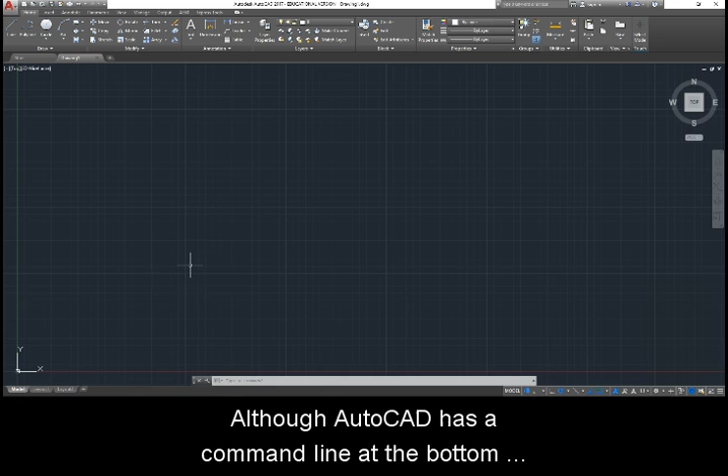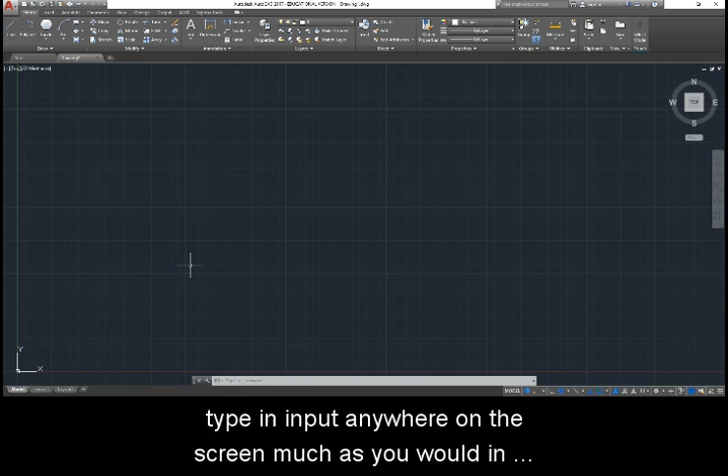Although AutoCAD has a command line at the bottom of the drawing area, which allows you to enter commands directly into the program, there is another more efficient way to manually enter commands called dynamic input. Dynamic input allows you to type input anywhere on the screen, much as you would in the command line. Let's draw a few shapes to see how this works.

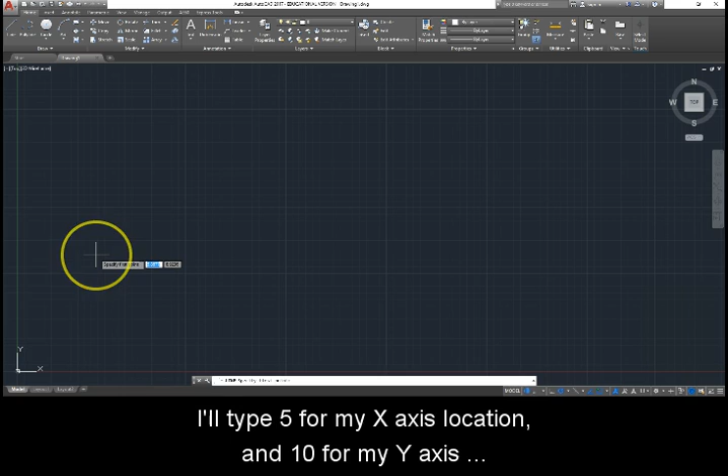First, I start the line tool. On the screen, I can park my cursor anywhere I wish to enter a Cartesian coordinate to establish the first point of my geometry. I'll type 5 for my x-axis location and 10 for my y-axis location, then push the enter button on my keyboard. My first point has been established at the exact coordinates I entered.

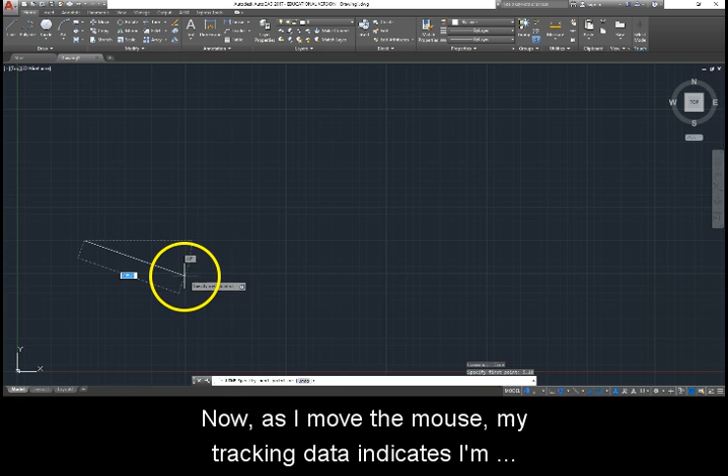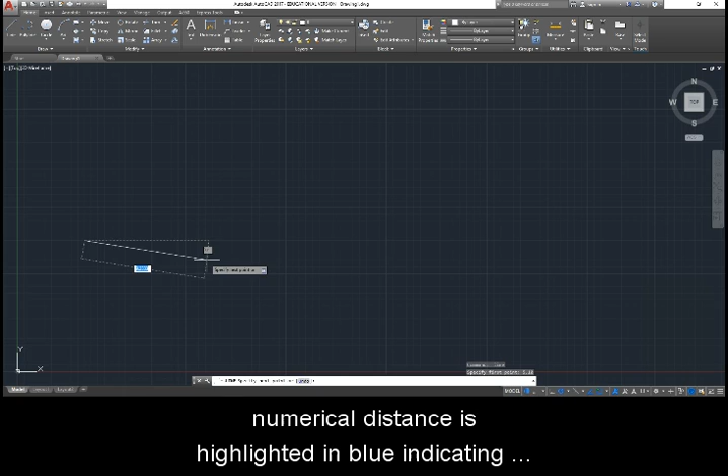Now, as I move the mouse, my tracking data indicates I'm working with polar coordinates. It gives me two dialog boxes, one with a numerical distance and one with a polar angle that change as I move the cursor around. The box containing the numerical distance is highlighted in blue, indicating that I can type input. I type 10 in the numerical distance box, which is also known as direct distance.

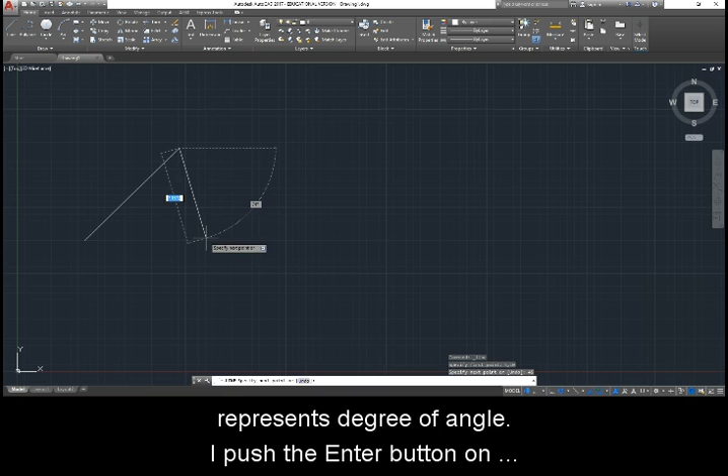Then push the tab button on my keyboard to switch from direct distance to the polar angle box and enter 45, which represents degree of angle. I push the enter button on my keyboard and geometry is locked in at 10 units in length at 45-degree angle. This is dynamic input. Let's try a rectangle.

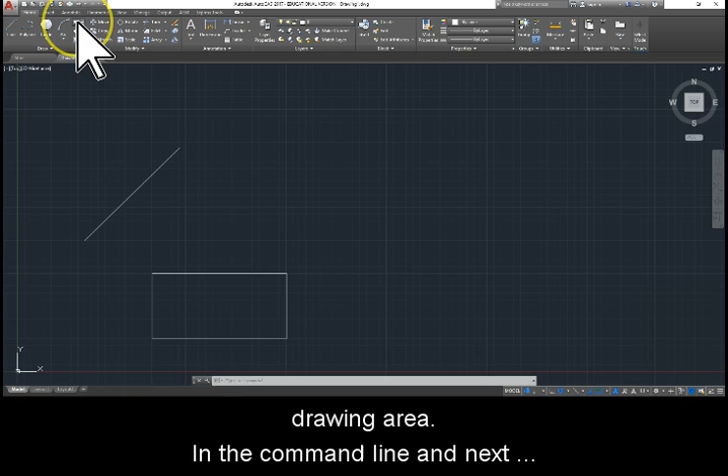I select the rectangle tool and bring my cursor to the drawing area. In the command line and next to my cursor, I see a message that asks for the first point of my rectangle. I can enter a Cartesian coordinate, but it's not necessary. I can simply click the left mouse button anywhere I wish to place the first point, and it will lock in automatically to that specific point using a Cartesian coordinate format.

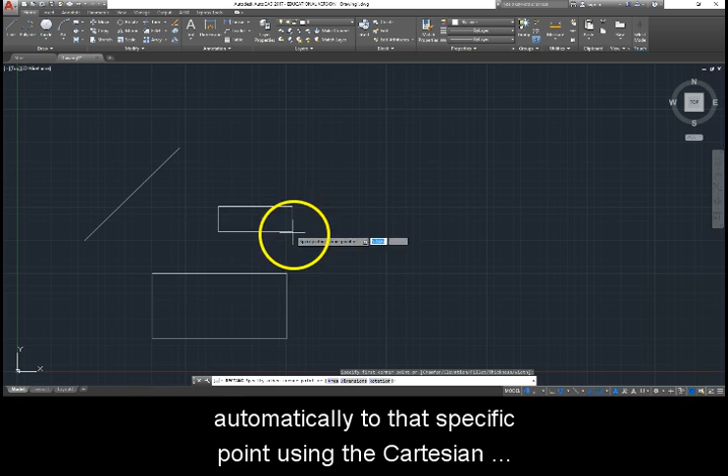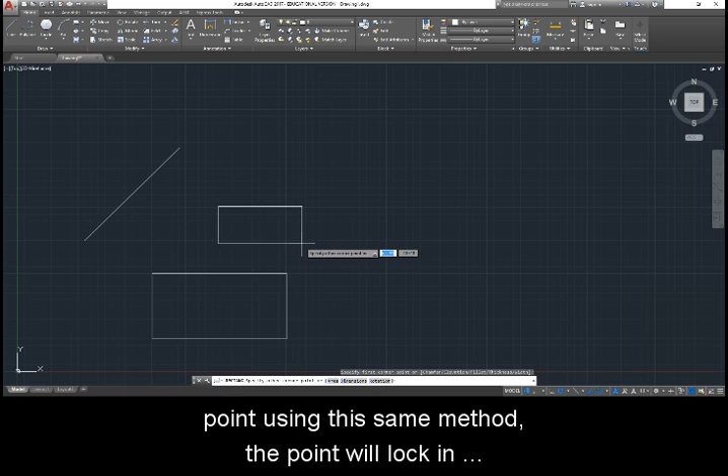Now, in the box next to my cursor, it requests that I enter a point for the opposite corner of my rectangle. I can simply click wherever on the screen, and much like I did when I placed my first point using this same method, the point will lock in, however, using a coordinate that is relative to or based on the first point. Or I can type the exact size that I want the rectangle to be.

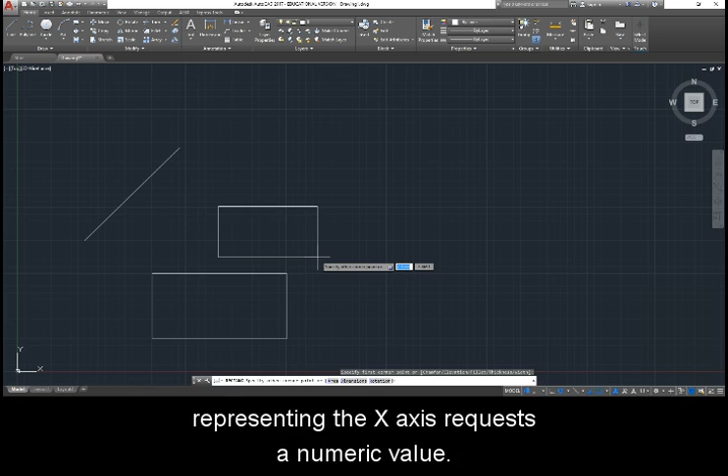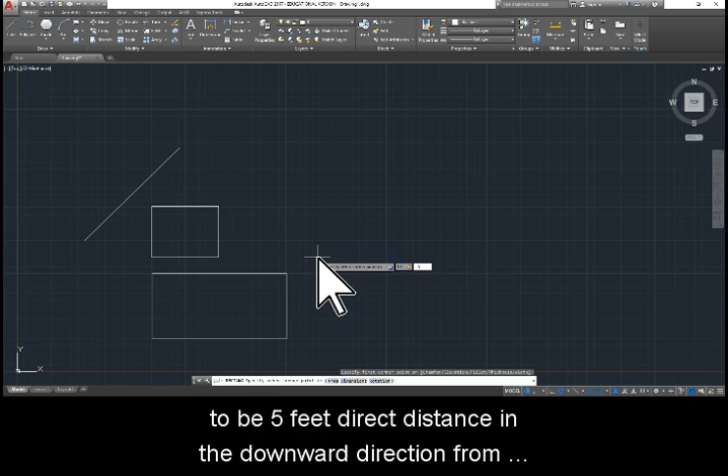Again, notice the first dynamic input dialog box representing the x-axis requests a numeric value. I'll type 10 to represent 10 feet direct distance because I want this rectangle to be 10 feet wide. Now I'll push the tab button on my keyboard to switch to the y-axis input box and type -5 because I want this rectangle to be 5 feet direct distance in the downward direction from the first point that I placed. If I were to type 5 instead of -5, my rectangle would form above the first point, like so. Keep that in mind for later.

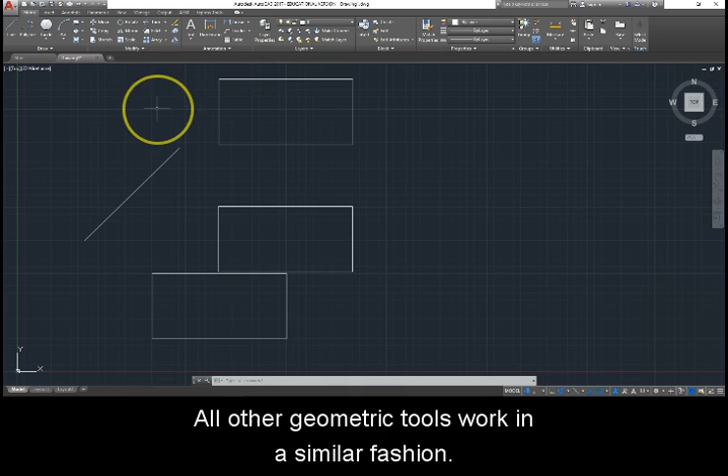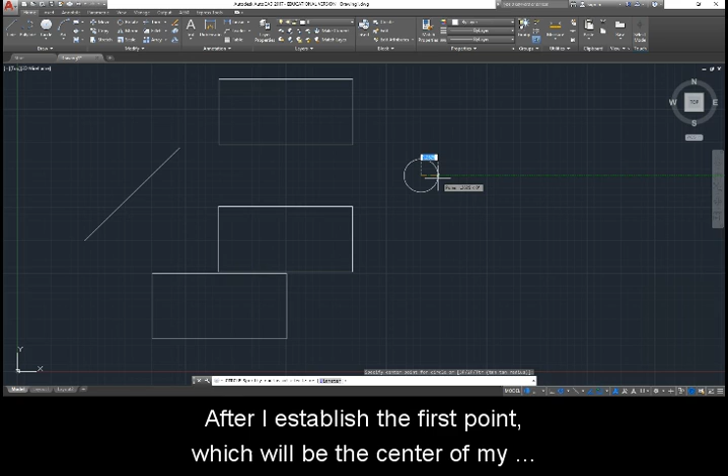All other geometric tools work in a similar fashion. I select the circle tool from the draw panel and move to the drawing area. It requests that I establish the first point of the circle and I can just click anywhere in the drawing area or enter a Cartesian coordinate. After I establish the first point, which will be the center of my circle, it asks for more input to indicate the radius of the circle. If I would rather input the diameter, I type a D and enter the numeric value of the diameter. This is again direct distance.

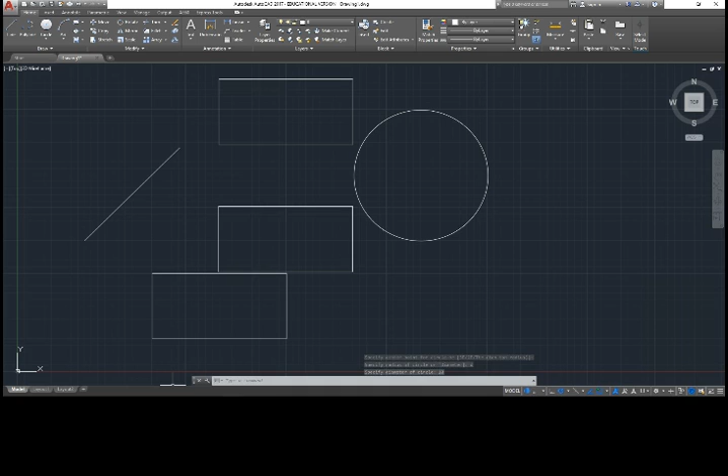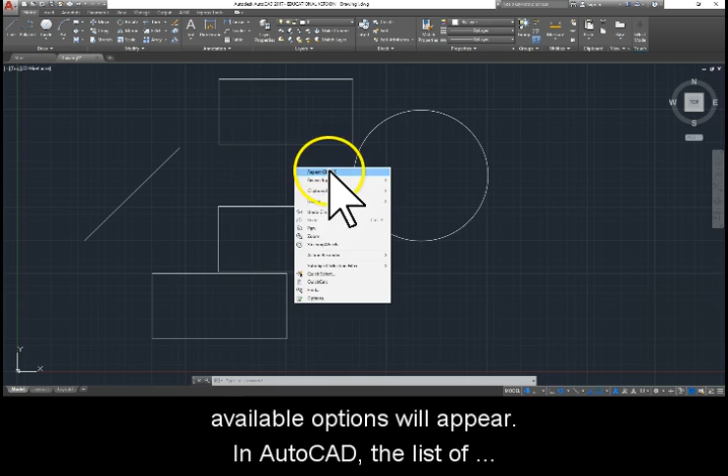Now that we have a couple of new shapes in the drawing area, I can show you how to use the shortcut menu. At any time, you can click the right mouse button, just like you would in any software program, and a menu listing available options will appear. In AutoCAD, the list of options depends on the tool you are currently using. Without being in any tool, the options are pretty generic.

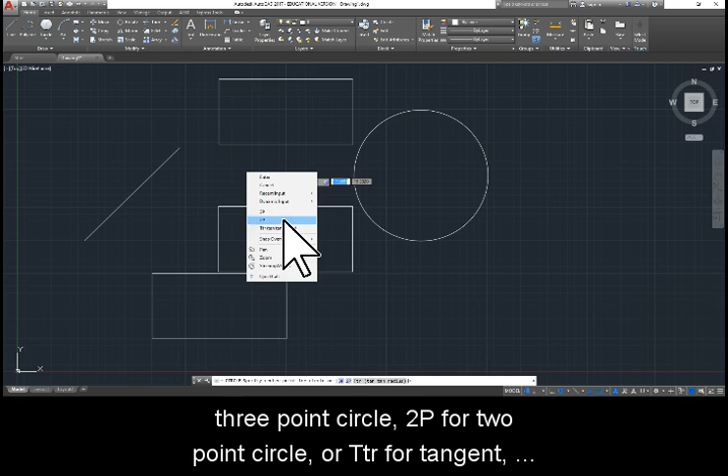But if I click on the circle tool, then right-click the mouse, I get options that pertain to the circle tool, such as 3P for 3-point, 2P for 2-point circle, and TTR for tangent tangent radius. If I'm in the rectangle tool, as you can see, I have a few different options as they pertain to establishing a rectangle, such as chamfer, elevation, fillet, thickness, and width.

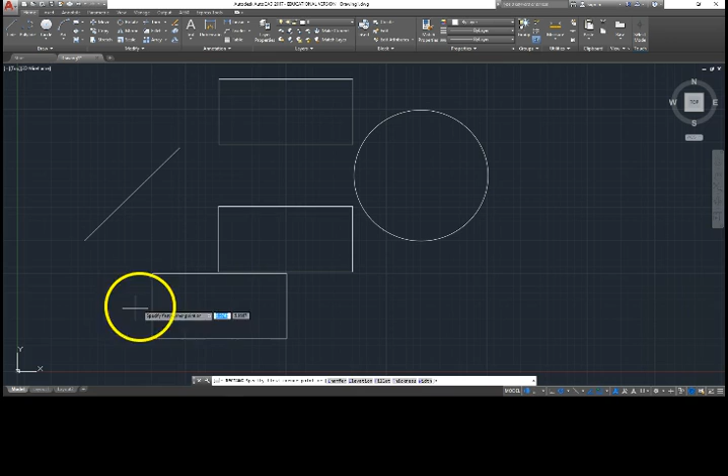That's it, guys. That's how you use dynamic input, direct distance, and shortcut menus.